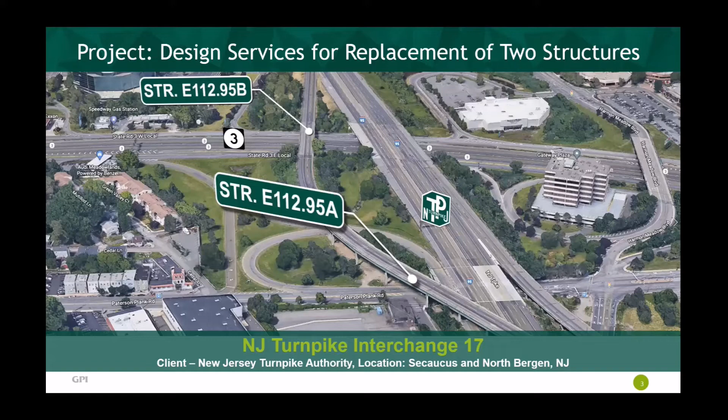Not everybody is familiar with the area. Interchange 17 in the center there is the exit that connects Turnpike southbound traffic to Route 495. Route 495 is the road that then connects to the Lincoln Tunnel into New York City. Route 495 is also where the exclusive bus lane is located.

And right there where 495 comes into Manhattan, that's the location of the Port Authority bus terminal. The combination of the bus terminal, which is scheduled to be redeveloped, the tunnel, the Helix roadway, which is this lower speed spiral roadway that connects the elevated 495 down to the tunnel entrance, all of these things are capacity constraints in the existing network.

Let me also throw a couple of statistics here about the level of traffic that we're talking about. Pretty much these roads that I've highlighted here carry over 100,000 vehicles per day. 495, Route 3, which is the connection to Western New Jersey. The Turnpike is actually two separate roadways here: the Eastern Spur on the east side of the Hackensack River, and then the Western Spur on the west side.

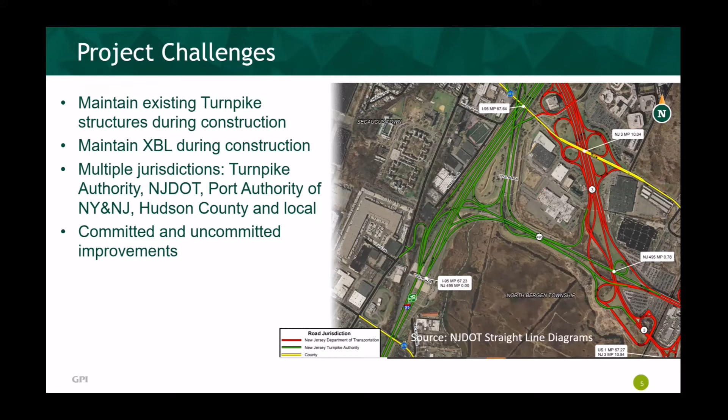It opened in 1970, pretty heavily used even back then, 9 million passengers a year. In 2019, 1,850 buses per day, 18.5 million passengers per year. And the estimated travel time savings versus general purpose lanes, 15 to 20 minutes.

And as you can see, and we'll be talking about this later in the presentation, when those buses queue, because there's no place else for them to queue, they're basically queuing in the general purpose lanes and creating problems for everyone else who needs to weave through them or across them or make their decision well upstream in order to avoid those queues.

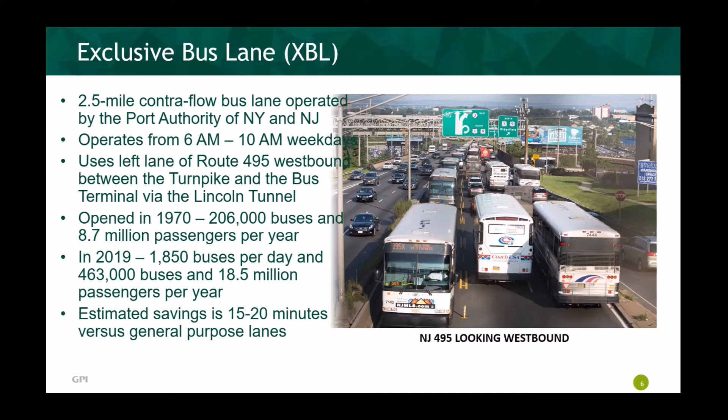And what that means is that if you are not familiar with the area and you go through the right side of the plaza, you're really going to have a lot of trouble trying to exit to the local exit, which is to the left. And similarly, you pass through the toll plaza on the left side, you're going to have a lot of trouble getting to 495 and to get through the bus queue.

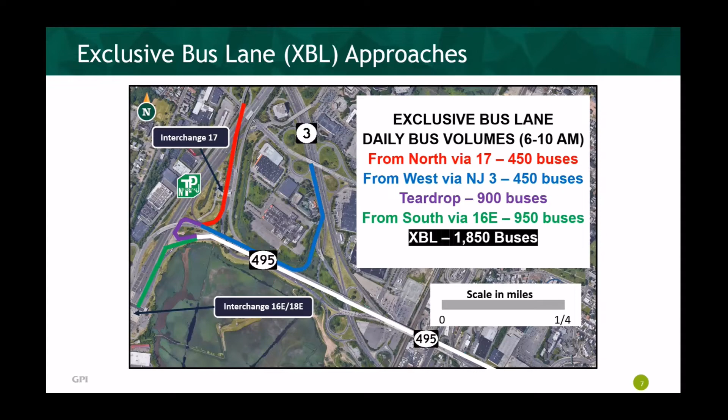All right, in developing the VISSIM network, obviously this was not the first VISSIM network that was ever developed for this area. We talked about there being multiple agencies involved here, and basically each agency had their own model. So I tried to follow the approach of building on the work that was done before, but recognizing that no one was really focused before on Interchange 17, and certainly no one was focused before on the impact of the XBL queues. So enough network to cover the issues, but I didn't want to be making the network any larger than it needed to be.

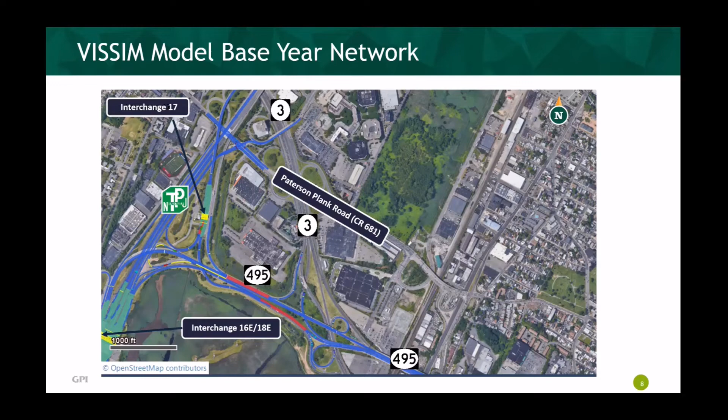All right, let me get into the couple of issues that I want to cover in the next few minutes of my presentation. Looking at the impact of the exclusive bus lane queues. Also looking at the impact of downstream congestion. As I mentioned before, the helix, the tunnel, the bus terminal, all of these things are bottlenecks in the system, and the queues from those bottlenecks spill back and impact this area that I'm trying to look at, which is, I guess, 2 to 2.5 miles upstream.

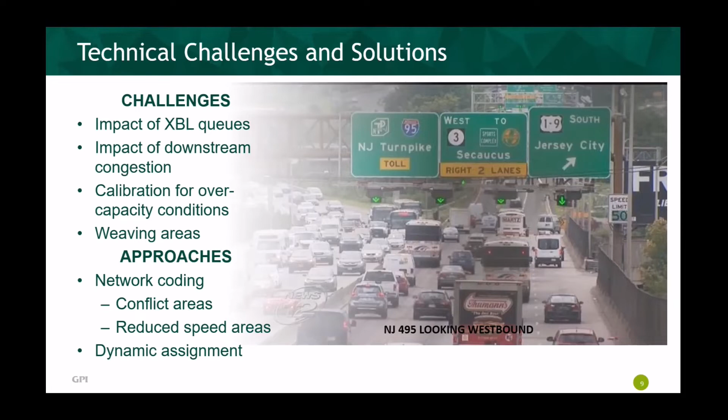But the buses know and the autos know that in that one particular spot there, they don't queue there. They leave a gap so that vehicles who want to go to the local exit to the right know that they can pass through the plaza on the left side of the plaza and then weave across. I guess vehicles that don't know wind up getting stuck on 495, but in looking at multiple pictures, the gap is there, it's always in the same place.

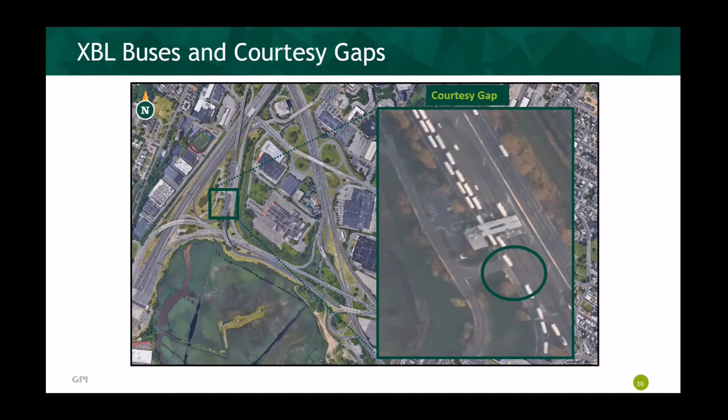So now how do we model that gap? And VISSIM gives us many different ways of doing this. The way that I chose was to create a conflict area in that area where the autos looking to go to the local exit would have priority over the buses, who would stop and would not enter the conflict area unless the bus could totally clear the gap area, so that the back of the bus would never be blocking any autos.

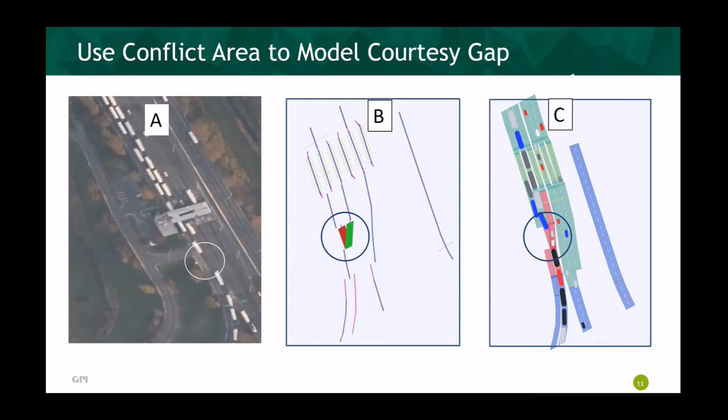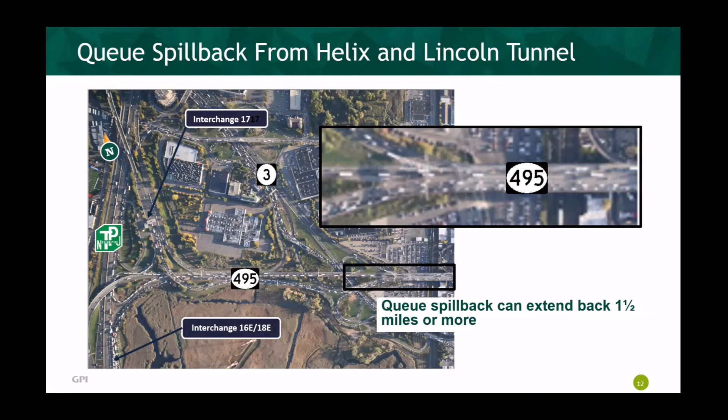The other that I mentioned is the queue spillback from the tunnel and the helix, where that queue will spill back 1.5 miles or more, and eventually that queue spillback is impacting Interchange 17, Interchange 16E, as you can see on the photo, and we need to account for that in our network. But we don't want to be adding a lot of very complicated network in order to try to model what's going on downstream. So what I tried to do was to take advantage and use reduced speed areas in a way that I really hadn't used them before.

Reduced speed areas, typically you're using them for horizontal curves, toll plazas, turning movements at intersections, although I guess a lot of that is going away as well. One of the beauties of reduced speed areas, as with so many other features, is that you're able to control the speed, but you're also able to control the duration. So the reduced speed area can be in place for as much of the simulation as you want. You're also not limited to one area per section. They can overlap as long as they're operational at different times of the day.

So what I did here was I said, okay, let me set a low reduced speed area during my warm-up period, and then once I reached, I'll use the term equilibrium for lack of a better word, at the start of my analysis period, from that point forward I didn't want the reduced speed area to go away, but I would have it at a higher speed.

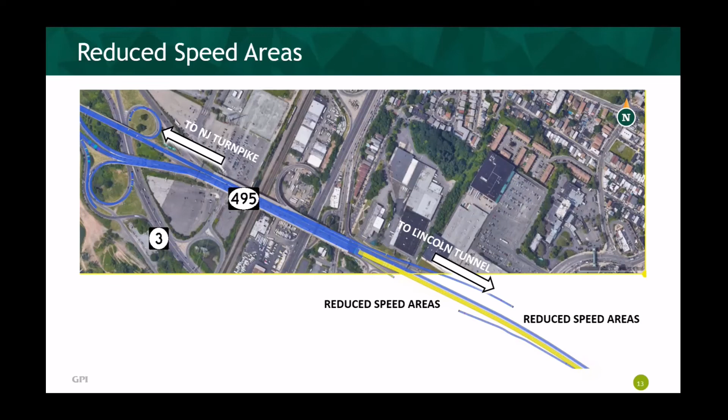And then ultimately through trial and error, getting a situation where I feel like my network is looking like it should, where I've got the right level of congestion visually, the right level of queuing through the network, and then I can check this by looking at the travel times through my network to make sure that's working as well.

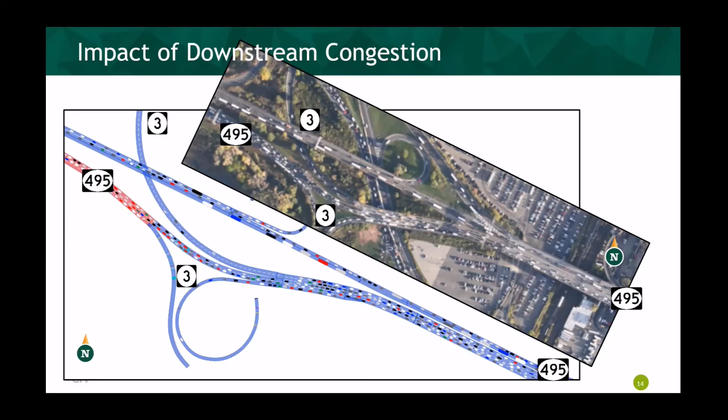Getting that page down. All right, let me talk about model calibration, and specifically model calibration in overcapacity conditions, when demand exceeds capacity. Because when you have that condition, you can't just be calibrating to the traffic volumes, because the traffic volumes that you're measuring are not the demand, they're basically the capacity of the bottleneck.

Another challenge of this project is it started 2-3 months before the start of the pandemic and didn't stop. So collecting new traffic data was really not an option. What I had to do was go back into multiple older studies and try to extract whatever existing pre-pandemic data there was. And okay, that's what I am going to calibrate to.

The additional challenge is you're calibrating to a combination of 2015, 2017, 2018 traffic volumes, different months of the year, data where you're kind of questioning the quality, but you do the best you can. In terms of matching the traffic volumes, everybody's familiar with the GEH statistic, target of less than 5. I felt I was working well there, except for that one location, which is a single lane.

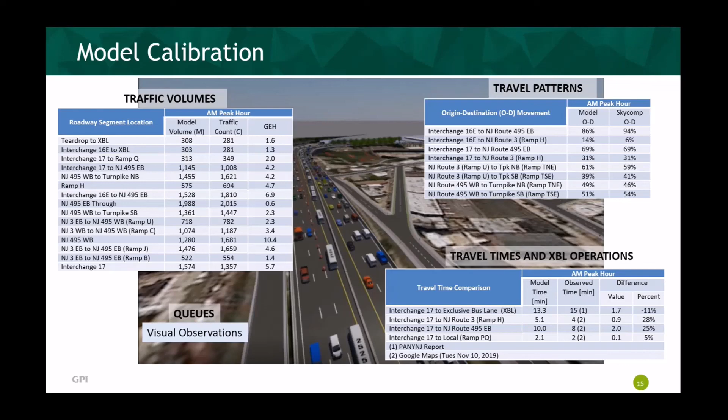Let me just close with the weaving section. I've been thinking about this the past couple of days, talking to other people. My background was travel demand modeling, always creating OD matrices. So when I got into traffic simulation modeling, with dynamic traffic assignment you create a matrix, and that's how you run your models within the microsimulation. But for most locations, that's a really inefficient way of doing the work.

In this case, the old Ken Hausman would have said, it's a weaving area, you've got to use dynamic traffic assignment to get it right. But it's a simple weaving area: 2 origins, 2 destinations, static routes will work fine. In a more complicated weaving situation, or where you want to look at route diversion, as in the previous presentation, that's really where dynamic traffic assignment for microsimulation has a role going forward.